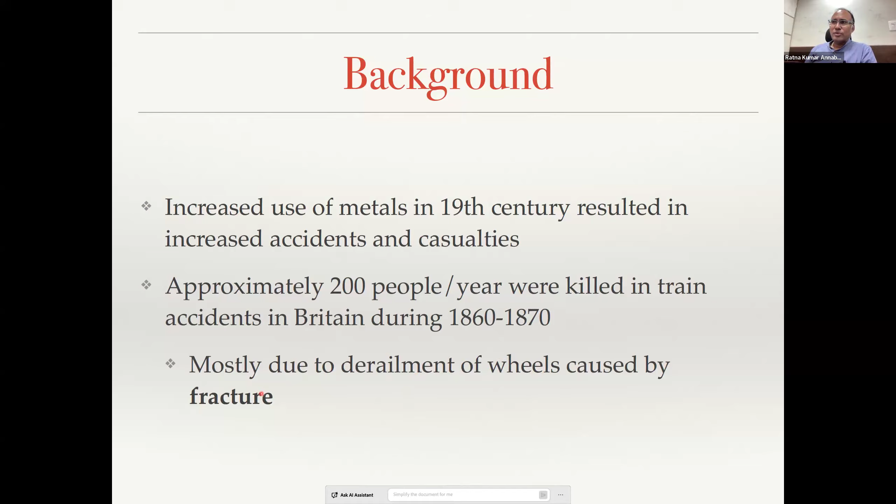Most of these accidents happened due to derailment of wheels, that means railway wheel derailment primarily caused by fracture. That means the wheel would have broken, for example, and that led to the failure, or led to the accident.

So if you look at news items on fracture failures in Britain: on 19th March 1830, at the Montrose Suspension Bridge, which had suspension wires made of steel metal cables, at one point there were 700 people standing on the bridge to watch boat rides, which were quite popular in Britain. The suspension bridge collapsed, meaning one of the wires gave way and then the bridge collapsed.

And in 1887, it seems to have been a very disastrous year for railways in the UK, where within a span of 3-4 months there were several accidents. On 20th April 1887, they saw the most serious train accident, which happened because of the breakage of the drawbar. There are other similar accidents, most of them associated with fracture failure of the components.

Another popular failure was observed in these Liberty ship accidents. During the Second World War, Liberty ships were used in the Atlantic Ocean to fight Nazi forces, but in Britain, they were making these ships and didn't have enough capacity to make so many number of ships.

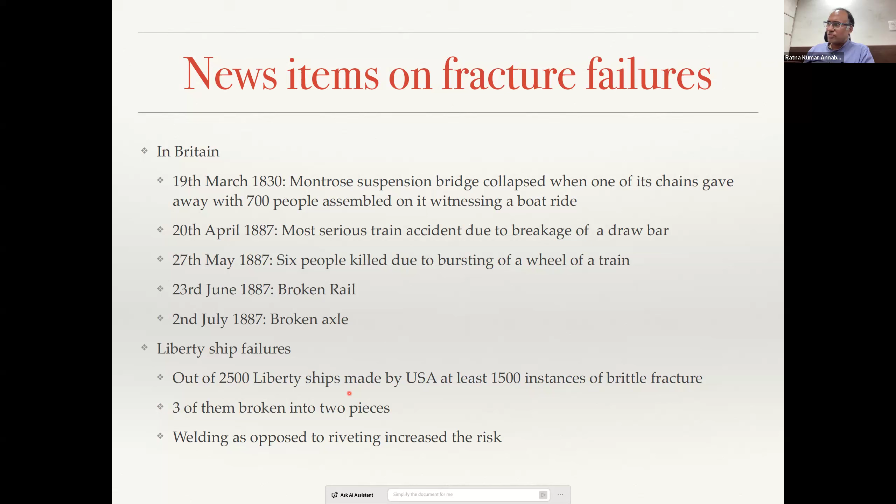So all these failures, whatever happened, are catastrophic failures primarily because of fracture, and all of them involved the presence of cracks.

For example, if you talk about commercial aircrafts, you do a periodic inspection every time the flight is taken, the moment it lands. There will be several inspections done, called visual inspections. But from time to time, every 3 months or so, they will do a detailed non-destructive evaluation of the flights.

Meaning, they will try to understand by sending ultrasonic waves and try to measure the length of a crack. All these structures will have cracks in them.

No matter what you do, you cannot produce a product without cracks. There will be cracks, but are these cracks of such a size that one needs to be worried about? That is what these periodic inspections will tell you. And if they are not critical, then they will let the flight fly. Otherwise, they will have to do some intervention.

Similarly, cracks or crack-like defects in ship structures, bridges, pressure vessels, everywhere you will have cracks. And hence also in nuclear reactors, cracks or crack-like defects are a serious concern. So one needs to keep in mind how to design components when there is a crack present in the material.

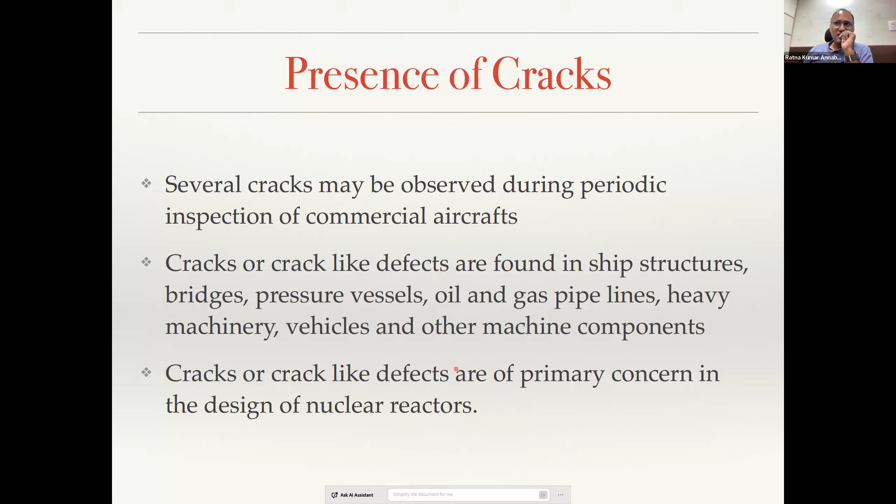So in the previous classes, we talked about the stress concentration factor. When there is a geometric constriction, you have stress concentration, because of which locally there will be very high stress generated, although far away your applied stress is less. That is designated by the theoretical stress concentration factor.

What does it indicate? It indicates the average load required for the onset of plastic deformation. That means if you apply 100 MPa, you may have a region where the stress concentration is 4, and hence locally the material is experiencing 400 MPa, which is much above the yield strength of the material. So one needs to be very careful about it.

This KT, the theoretical stress concentration factor, is limited to structures with known dimensions. As we saw in the last class, to compute KT you have to know the dimensions. Depending on the dimensions, the KT may change.

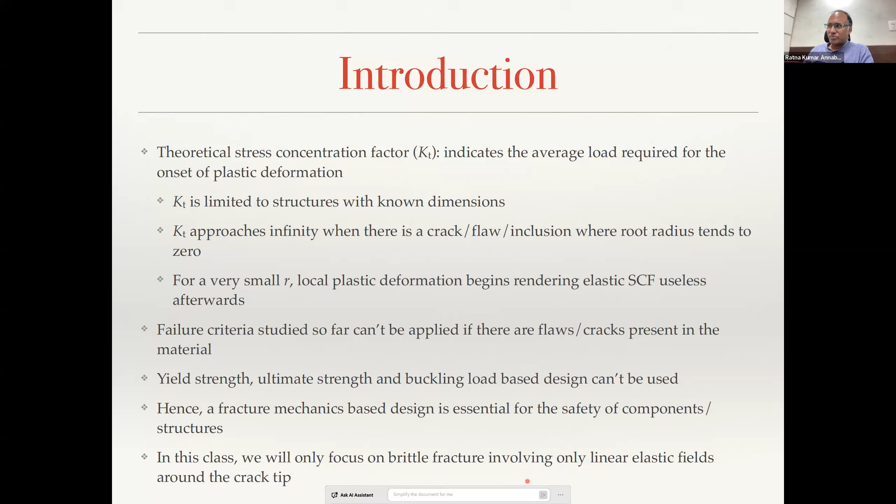As I told you, if you look at an elliptic crack, ellipsoidal crack, and you apply a far field stress, the stress concentration factor, sigma at any position, depends on the far field stress S times 1 plus 2 root C by rho. The sigma we are talking about is at the crack tip, at this position. Now rho is the radius of the crack tip.

What is the radius of the crack tip? If you plot the curvature of the crack tip, and plot the stress concentration factor, that is sigma by S on the y-axis, and x by rho, the position, on the x-axis, at a given position what is the stress? Far away it should be equal to sigma y, but near the crack tip it is going to be 7 times the stress, the stress concentration factor, depending on the value of C by D being 3, 2 times 3 is 6, and then it will be 6 plus 1 is 7.

So the stress concentration factor is 7. That means, although far field you have applied only 100 MPa, here you will see 700 MPa. And that could be much beyond the ultimate strength of the material, and hence you need to be concerned.

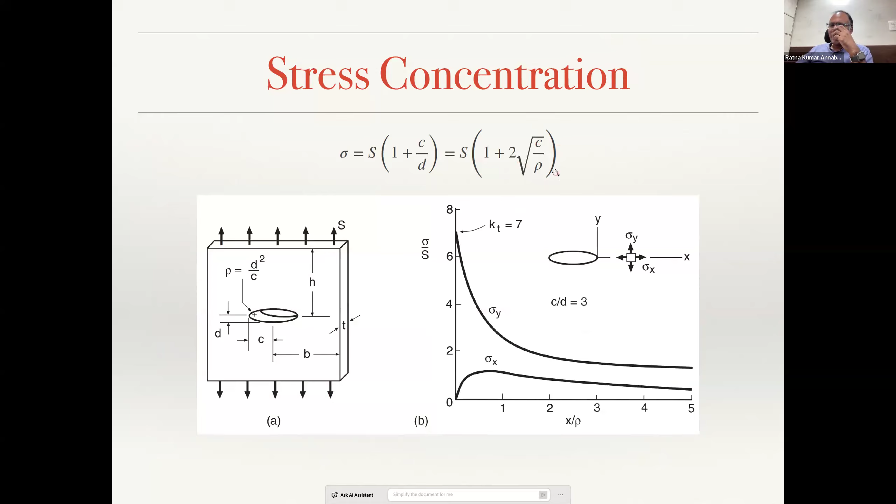Similarly, if you have a purely brittle material, you will have several micro cracks ahead of the crack tip, and those get activated when you apply the load. So there are different ways that the stress concentration can develop, but unlike the theoretical stress concentration factor that we estimated to be infinite, in reality it will never be infinite because of these various constraints we encounter in real materials.

Okay, now let us look at this particular scenario. On the left hand side in this figure, on the y-axis you are plotting crack size, on the x-axis as a function of time. Let us say you have a structure whose crack length is some number initially. As the structure is subjected to loading, as a function of time, the crack length is increasing.

So when the crack length is A0 here, the structure will have some strength. That is what we call the design strength of the material, assuming there is no crack. But as the crack increases its length, the material's ability to resist the load decreases, isn't it? The residual strength decreases, right?

And let us say you have designed a component whose expected highest service load is this, right? And you have designed the component here. From here to here, failure will not occur because the expected highest service load is here. And once the crack length increases beyond that, you will have further reduction in strength, and that is when failure may occur.

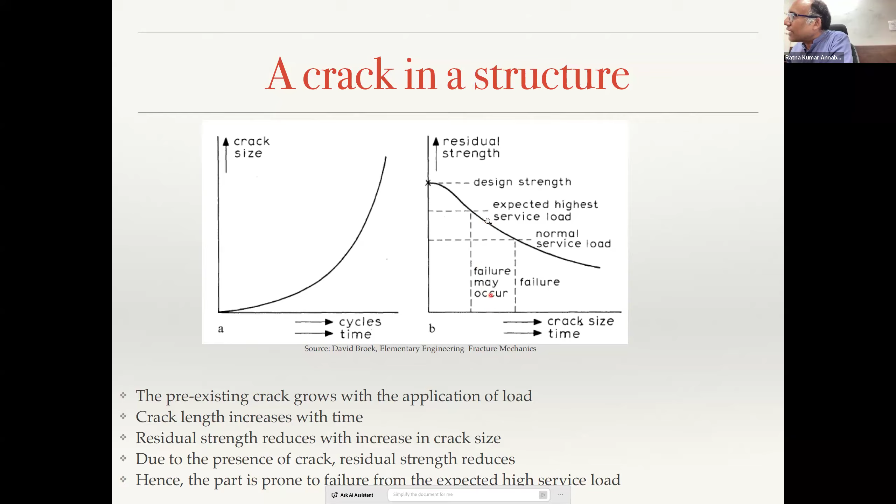Now the second question: let us say this is my service load, meaning this is the load that the component is going to be exposed to. The question I can ask is, what is the maximum size of crack that I can tolerate? I know my service load, so do I know the size of crack up to which I can tolerate? For example, if my crack size is this, then at the service load, the residual strength is this. If I am confident that my component is only going to operate at the service load, and I am not going to increase it, then depending on the factor of safety, I can possibly allow this much crack size. So that is the question: can I know what that crack size is that I can allow?

The third question is, let us say I know what the critical crack size is. I should ensure that I know my service load, and I should ensure that my crack size does not go beyond this value. Now, when I commissioned the component, I did the NDT and found that the maximum crack size is some number, much smaller than the critical crack size. When will the structure fail? When this initial crack size grows to the critical crack size - that is when the structure will give way. Now the question is, how long does it take for this initial small crack to grow to the critical crack size? That's important information for us as engineers to decide whether we can keep the component in service or not.

For example, if I have designed an automobile axle, and the service life of the automobile axle is 20 years - that is the maximum service life I have given, I have not given warranty beyond 20 years - now the question is, what is the maximum size of crack that can be permitted when the structure starts its service life? Meaning, if I have to give a life of 20 years, at the beginning of service what is the maximum size of crack that I can have? If I have a crack larger than that, I cannot give 20 years of service, because within 20 years it might reach critical crack size.

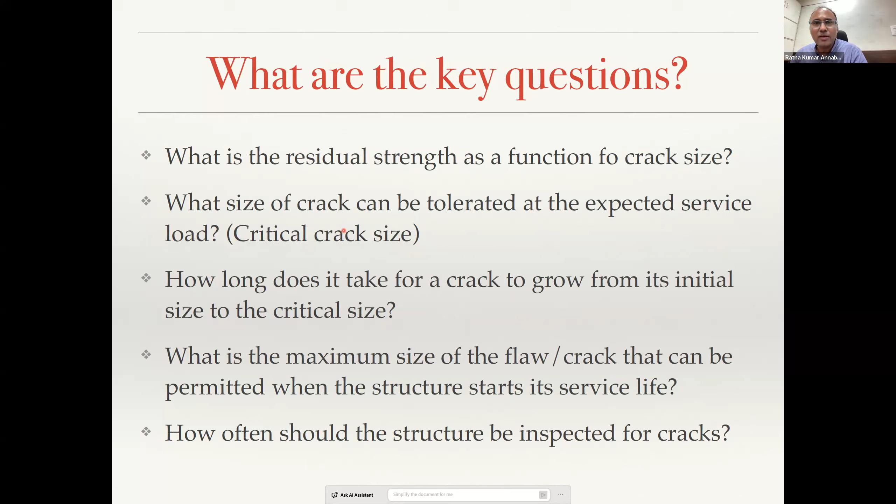These are questions that we have, and the answers to these questions are extremely important in order to ensure safe working of a component that you are deploying. So who will answer these questions? The answers to these questions, or some of them, can be given by fracture mechanics. If you adopt a fracture mechanics approach, you can answer some of these questions. For the other questions which cannot be answered directly by fracture mechanics, fracture mechanics can show a direction in which you can go in order to find the answer. That is the reason why we need to study fracture mechanics.

Okay? Any questions until now?

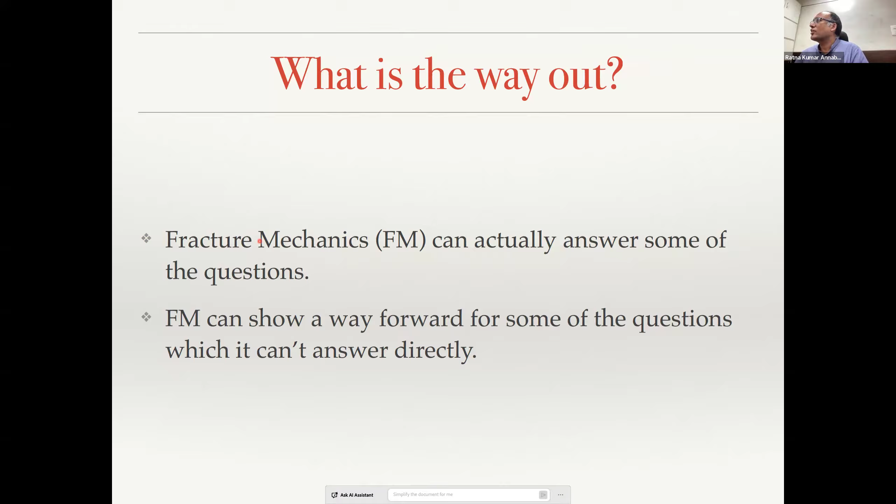Okay, if there are no further questions, now what do we mean by fracture mechanics? At what scale do I need to study fracture? There are various scales at which we can understand it.

One, you can start from the atomic scale, meaning you can actually talk about interatomic bond failure. That is also fracture mechanics, but it's interatomic bond breakage. So when do two atoms get separated? Suppose if you apply only a normal load, how do they get separated? If you apply an oblique load, how do they get separated? Is it the same way?

Then you have an intermediate level where you talk about crystals and dislocations, individual atoms, individual grains. That's a much higher length scale, looking at how a crack propagates through the grains. This happens at a few micrometers to millimeter scale, while plasticity happens at a few millimeter scale, because you homogenize these individual grains and only talk about macroscopic plastic deformation. There you talk about how the crack grows.

And then you talk about laboratory scale testing to measure the fracture toughness of the material. But all these should be used at the application level. If you are designing an aircraft, you need to ensure it will not break after so many flights. So fracture mechanics cuts across all these length scales, and a successful design based on fracture mechanics requires knowledge across these domains.

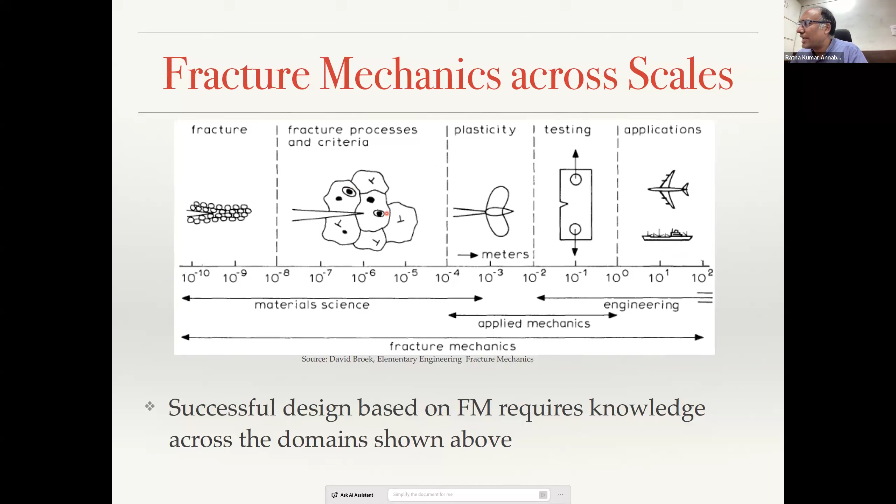That is why we studied crystal structure and deformation mechanisms, and what we mean by plastic deformation, and macroscopically, how the stress strain curve looks like. All these we have had a gentle introduction to. So having this knowledge will enable us to understand fracture mechanics based design a little better.

Okay, so now whenever we talk about fracture, we talk about modes of fracture. There are 3 modes of fracture. This is what we call the opening mode.

So if you have a specimen like this, and this is your crack, and this is your crack face, and if your load is applied normal to the crack face and it opens the crack, this is called mode 1 crack, the opening mode. And if your applied load is parallel to the crack face, in the plane of the crack face, then it is called mode 2.

This is what we call sliding mode. And this is mode 3, which is called tearing mode, wherein the load is not normal to the crack face, but is in the out-of-plane direction to the crack surface. So that is what we call tearing mode. Any failure in a component can happen only in mode 1, mode 2, or mode 3, or a combination of these modes, depending upon the type of loading.

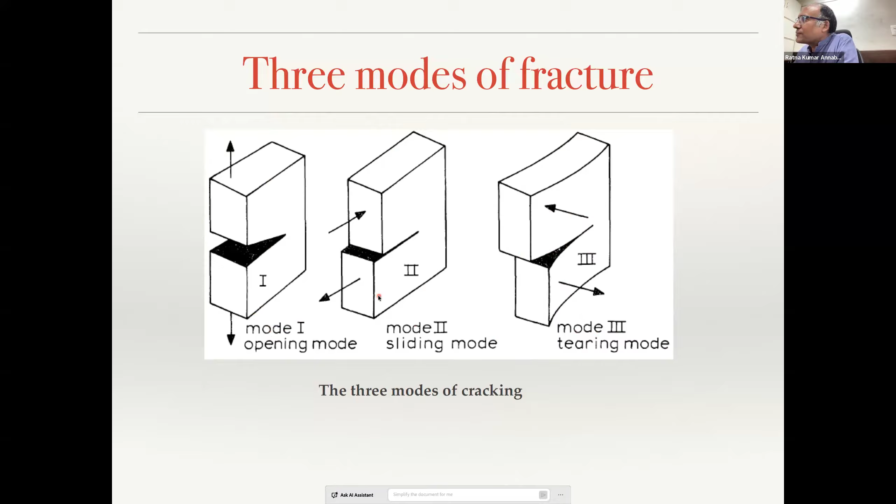So now let us do a very interesting experiment in order to understand fracture mechanics. This is what we call a Griffith's experiment. Griffith is called the father of fracture mechanics. He did an experiment on a brittle material, or more precisely, on a glass plate.

He has a brittle material which is unstretched in this configuration, and then he took that and stretched the material. That means he deformed the material and then fixed it. So you take a material, deform it, and then fix the ends. After deforming, you are not letting it move anymore. The ends cannot move now.

And then what he did was, he took a knife and created a crack at the center. What happens then? When you create a crack at the center, what happens? It will start to grow actually. Not necessarily all the time. We will do this experiment in class now, and then you will realize what would happen. There will be some stress concentration. You have created the crack. Now let us try to understand what happens when you load the system. There is some strain energy that is stored in the material. Do you agree?

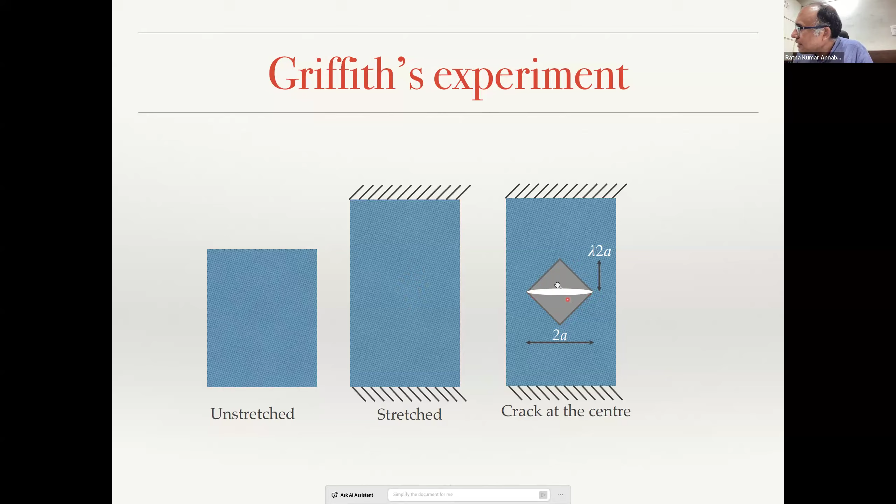Isn't it the energy should be consumed to create a new surface? That consumption is coming from the stored energy. The moment you create a crack, you have created a slit. That slit is formed by consuming the strain energy. The strain energy gets released. The stored energy gets released, and that is forming these 2 new surfaces.

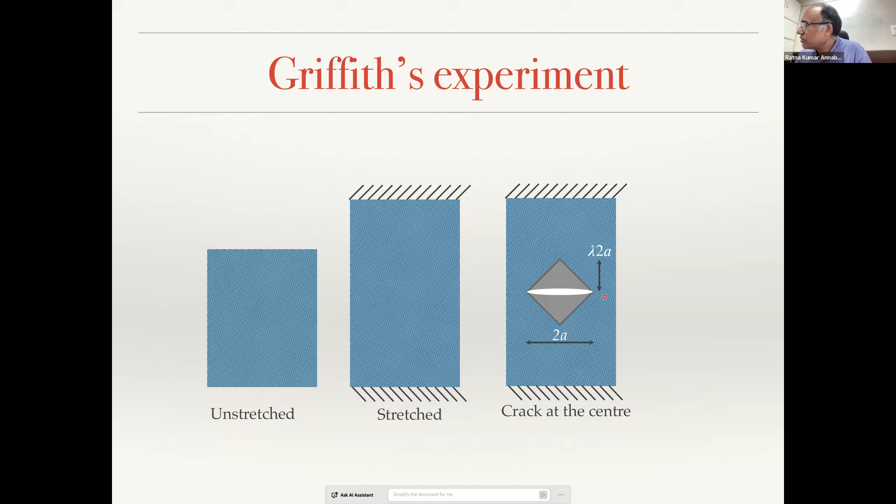Is that clear? So this is Alan Arnold Griffith. Now, where will the energy come from? The energy that is getting released to create these 2 new surfaces will come from the entire plate. But for simplicity, for the sake of argument, we assume the energy is coming from these 2 triangles, whose base is 2a and height is lambda times 2a.

So this is the experiment. Take a sheet, a paper, apply a force, stretch it and then hold the grips. What is the meaning of that? If I am taking this fellow, this is the paper, I am applying some load. I have applied certain load, but it is not flat enough, so I ensure that it is flat enough. After applying the load, hold it.

What do you mean by holding it? You should not be moving the grips. That means these ends cannot move anymore. It should be at that scenario. Now use a knife to cut a slit. So while holding, you ask your friend or someone close by to cut a slit in the center.

And the length of the crack is to be ensured to be small. If you cut a small crack, nothing will happen. Can some of you in the classroom, maybe 2 people, try to do this experiment? You take a paper, stretch it a little bit, hold it, and ask someone else to make a slit in the center. Nothing will happen if the slit length is smaller.

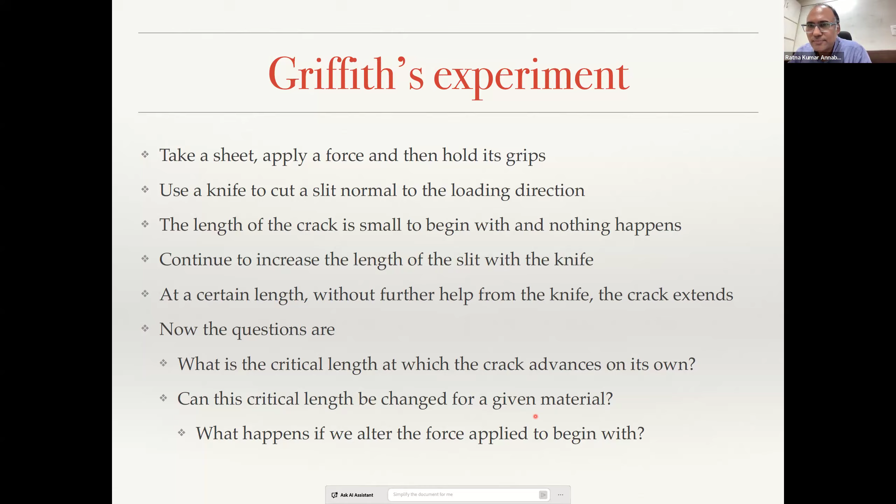Now the questions are the following. What is the critical crack length at which the crack advances on its own without any further help? And can I change this critical crack length for a given material? Also, if you have initially stretched it to x displacement and held it, or instead stretched it to 2x displacement and held it, is it going to influence the critical crack length? So these are the questions that we asked.

So now we need to understand surface energy. Like surface tension in liquids, solids possess something called surface energy. In a solid, all the atoms in the bulk are surrounded by a similar environment, whereas on the surface, only the atoms below the top layer offer bond strength to the top layer, but there is nothing above it. So the atoms at the free surface and few layers below have bonding force only from beneath and very little from above. As a result, the surface layers experience strain and deform. The deformation of the surface atoms is what we call surface energy.

And what Griffith said was, the crack in a material advances when the released energy exceeds the energy required to create 2 new surfaces. So when you are creating a slit, some amount of energy is released. And when that released energy exceeds the energy required to create 2 new surfaces, that is when the crack propagates. Otherwise, the crack will not advance. Is that clear?

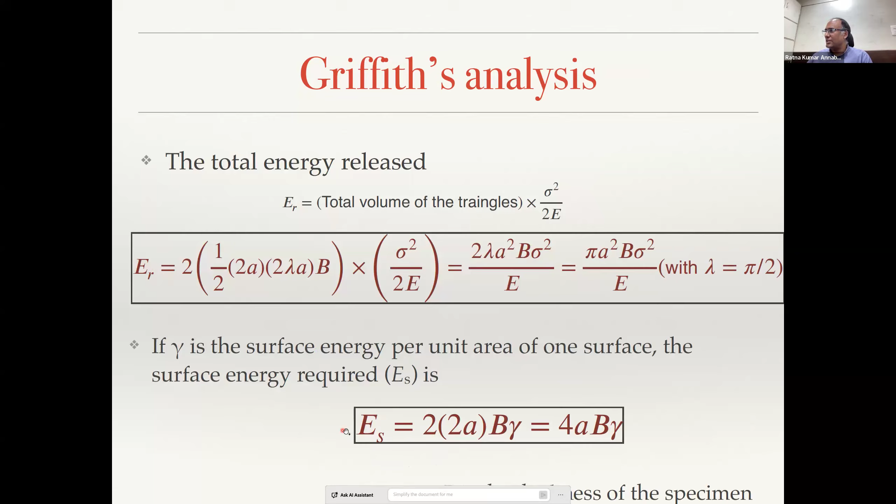Now if you plot this total energy released and surface energy, you will see that the surface energy increases linearly with A, the crack length - a linear relation. Whereas the energy released is a parabolic relation. So this one is surface energy and this one is your energy released.

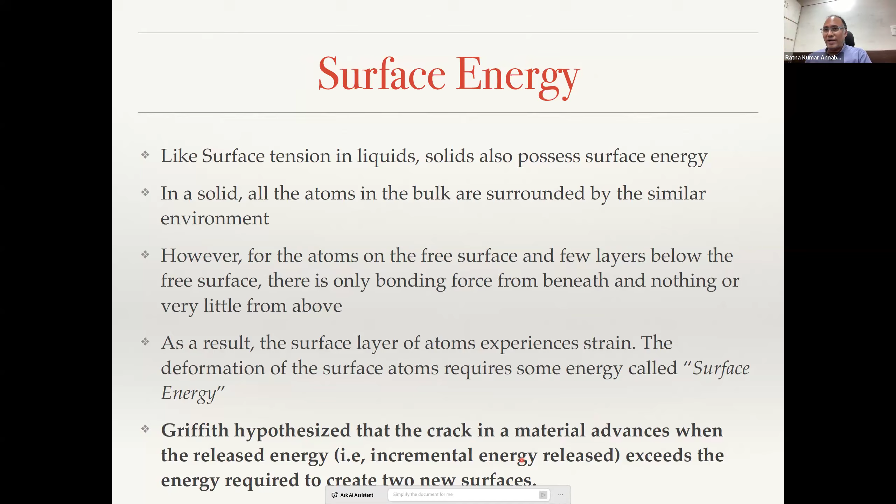And you will see, what did Griffith say? Suppose if you have a crack of certain length, and now if you increase the length by some amount, there is an incremental surface energy release for that small increase in crack length. If that incremental energy release is greater than the surface energy required at that instance, that is when failure happens. So what do you mean by incremental surface energy? The derivative, dER by dA, that is this.

From here to here, the slope is less than ES, because this line is parallel to ES - until here, the incremental energy released is less than the surface energy created. Beyond that, dER by dA, this slope, is larger than the ES value - that is when crack propagates. So that is why this is what we call critical crack length. If you have an initial crack of A0, the crack will not propagate until A0 becomes AC. After that, the crack propagates.

So if your dER by dA is greater than dES by dA, the slope of this line, then plugging in those equations, your critical crack length should be less than or equal to 2E gamma by pi sigma square. E is the elastic modulus, gamma is surface energy, sigma is the applied stress - the applied uniaxial stress. So your critical crack length depends on surface energy and elastic modulus, which are material properties, but sigma is the applied load. So if you apply a larger load, the critical crack length will be smaller - at a small crack length it will catastrophically propagate.

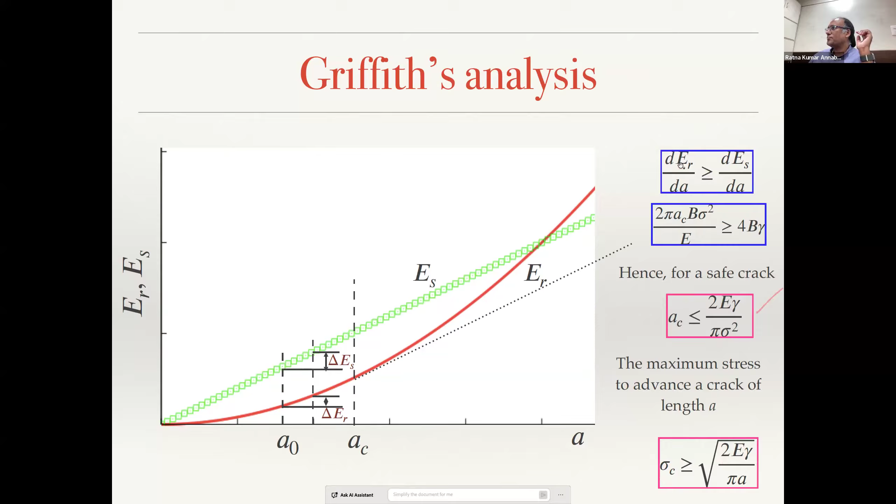So now with an advancing crack, the strain - we know that the strain energy in the component can either decrease or increase. We will see how it can increase. However, the stiffness of the component decreases.

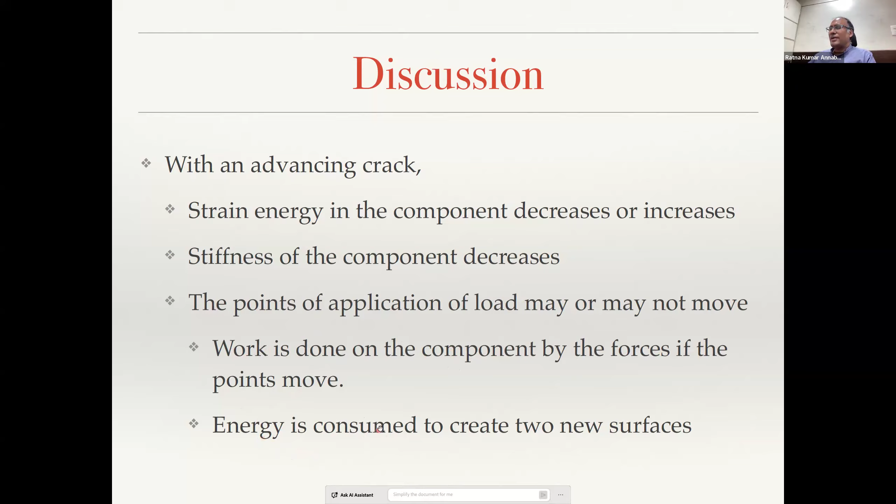Depending upon the boundary condition, the point of application of load may move or may not move. If you have a fixed boundary, the boundaries will not move. Work is done on the component by the forces if the points move. Otherwise, energy is consumed to create two new surfaces. This is something we already know.

Now we will calculate something called the energy release rate, that is, what is the energy released per unit crack length. That is dER by dA, which we have calculated. This is called the energy release rate, given the symbol G, in honor of Griffith. It tells you how much energy is released when a crack advances, per unit increase in crack area.

Let us consider an incremental increase in the crack area to be delta A. Initially you have some crack, and then you extend it, so the crack area increases by delta A. There is an incremental external work done to create this crack extension. You need to apply a load or do some work, so that incremental work is delta W external. As a result, the change in strain energy of the body is delta U. If it is positive, it is increasing; if negative, it is decreasing.

So the available energy, energy release rate times delta A, provides the energy balance. G times delta A equals external work, this is the energy per unit area times area, so energy equals external work minus change in internal energy. If you divide everything by delta A, and in the limit delta A tends to 0, you get the energy release rate G is equal to minus d by dA of U minus W external, where U is the potential energy or strain energy, and W is the external work.

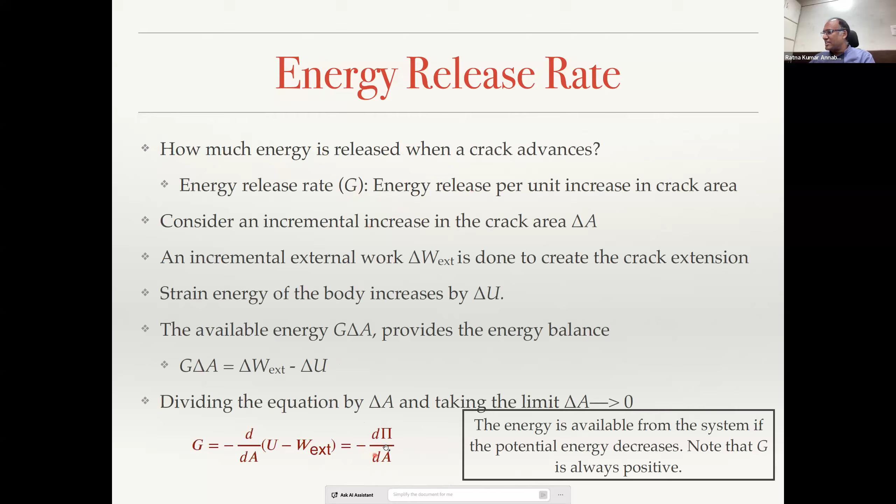Now let us assume a plate of uniform thickness B. Then G can be written as minus 1 by B, d pi by da. Otherwise, that dA is written as B times da, where da is the small crack length.

Now let us take the example of a DCB specimen. DCB specimen is a double cantilever beam specimen. Do you know how it looks like?

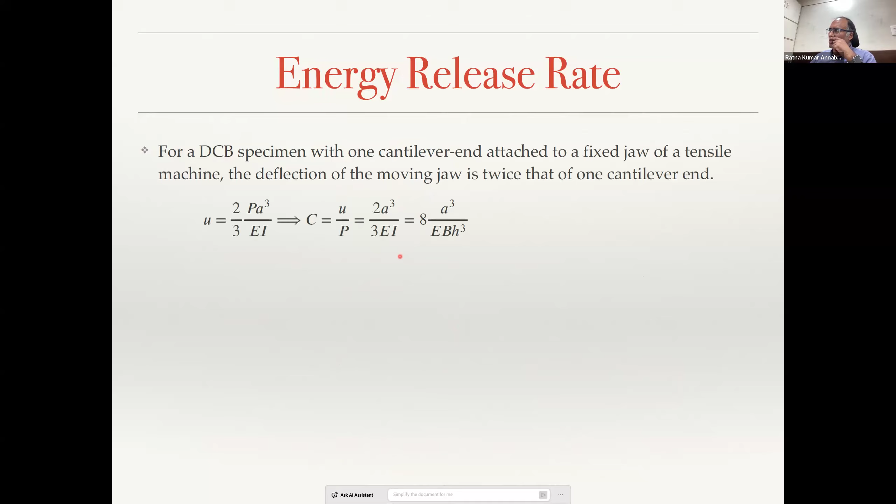It's not drawn yet, I just wanted to know how many of you know how the double cantilever beam specimen looks like. Or you don't know? You have to say yes or no. No sir, no sir, no sir. Why is it taking so long to answer? Okay, let me move to my slides.

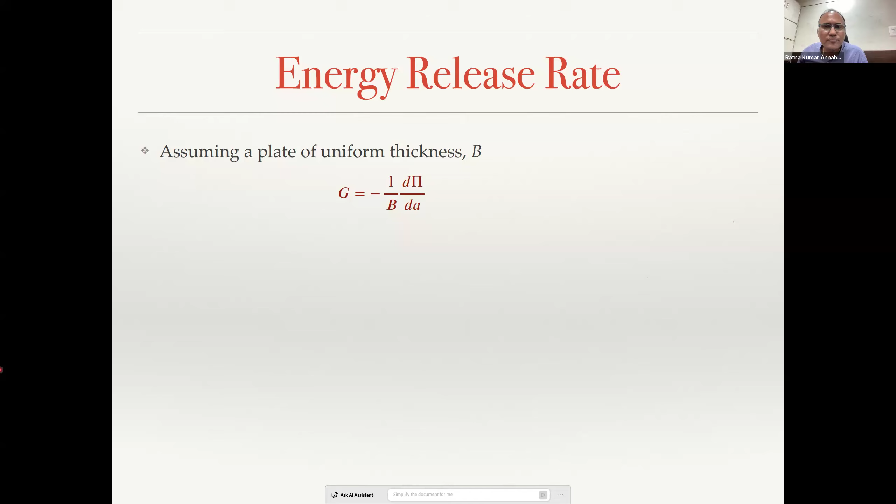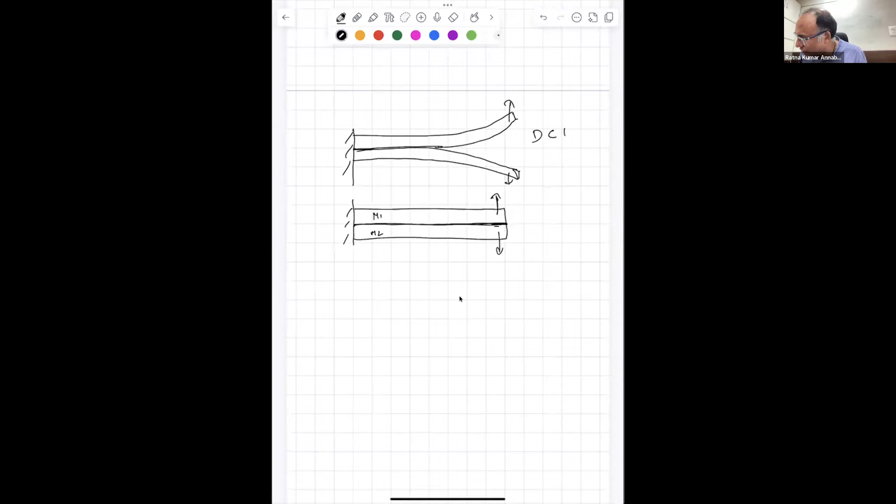A double cantilever beam specimen looks something like this. So initially you have this is material 1 and material 2, or it's the same material but with an interface. This is the interface. Now if you apply a load, let's say there is a crack here, then as you apply the load, the crack gets opened, and that is how this deforms. This is what we call a double cantilever beam, because this is one cantilever, and this is another cantilever.

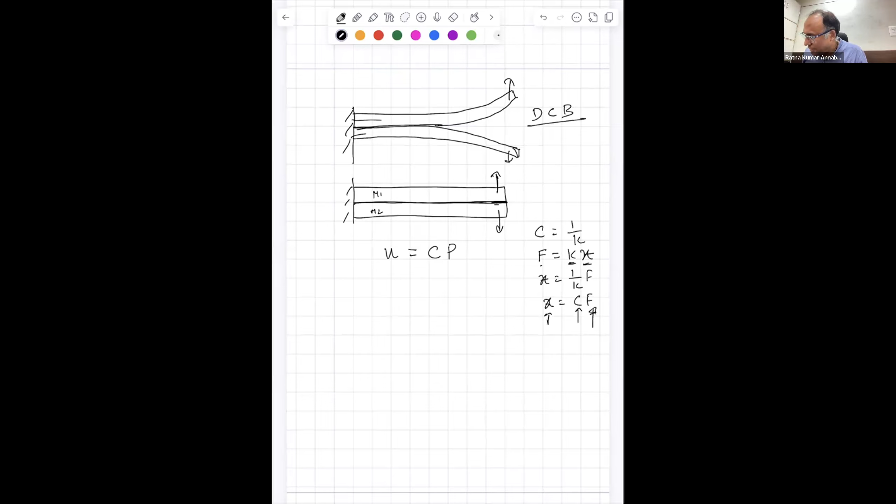Now let us say in this double cantilever beam specimen, the displacement U is written as compliance times load. What is compliance? Opposite of stiffness, right? Compliance is 1 by stiffness K. Normally F is equal to Kx, force equals stiffness times displacement. So x is equal to 1 by K times F, that is C times F. So displacement is equal to compliance times force applied. Here this is displacement, this is compliance, and this is force.

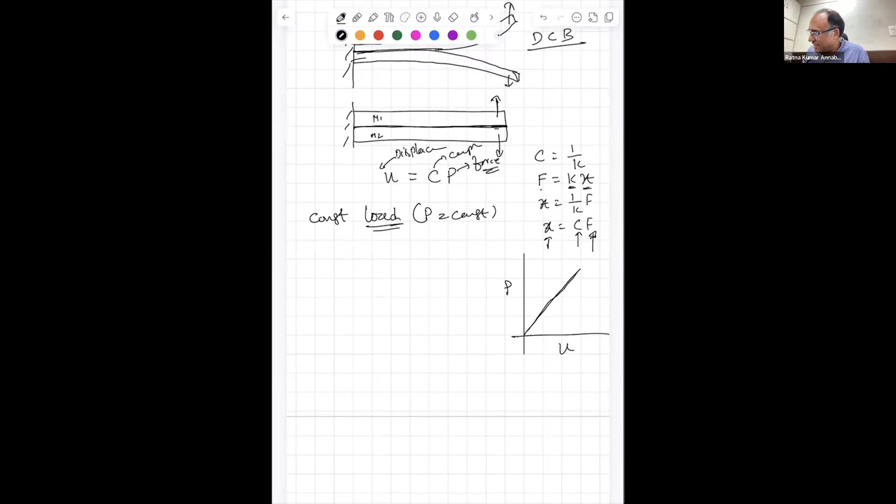Now let us take a scenario where we have a constant load applied, that means P is equal to constant. Then the strain energy, this is a linear elastic material, so P versus displacement will give you a straight line if it is linear elastic. So the strain energy can be written as half P times U, since strain energy is the area under this curve. Now W external work: if I am applying a load P, because of that there is a displacement U. Force times displacement is your work done.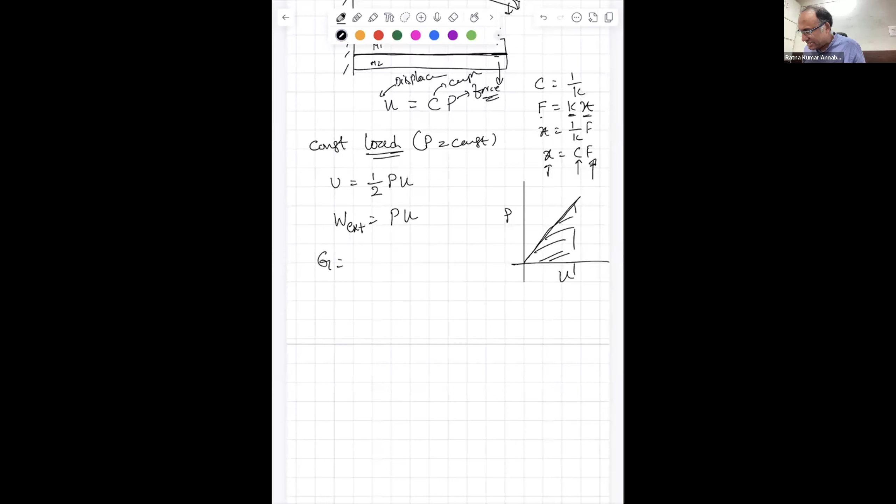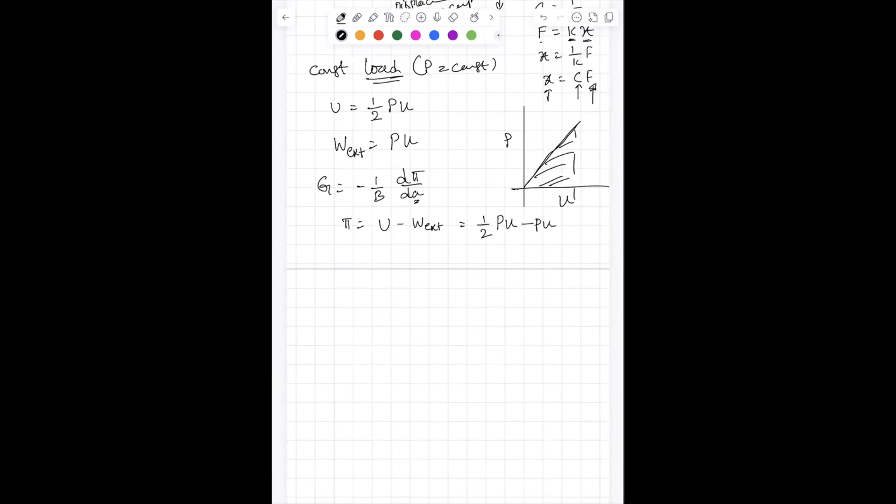Now the strain energy release rate is given as minus 1 by B, d pi by dA, where A is the crack length. What is potential energy? U minus W external. So that is equal to half Pu minus Pu, which means your potential energy is minus half Pu. So now G is equal to minus 1 by B, d pi by dA, that is equal to 1 by B, d by dA of half Pu.

We are applying a constant load, right? So P is constant means P can be taken out. Then that means P by 2B, du by dA. But we have written that U is equal to Cp. That implies U is equal to Cp, so that is equal to P by 2B, d by dA of Cp. Again, P is constant so I can take it out. So this becomes P square by 2B, dC by dA. That is your energy release rate, where C is the compliance of the material.

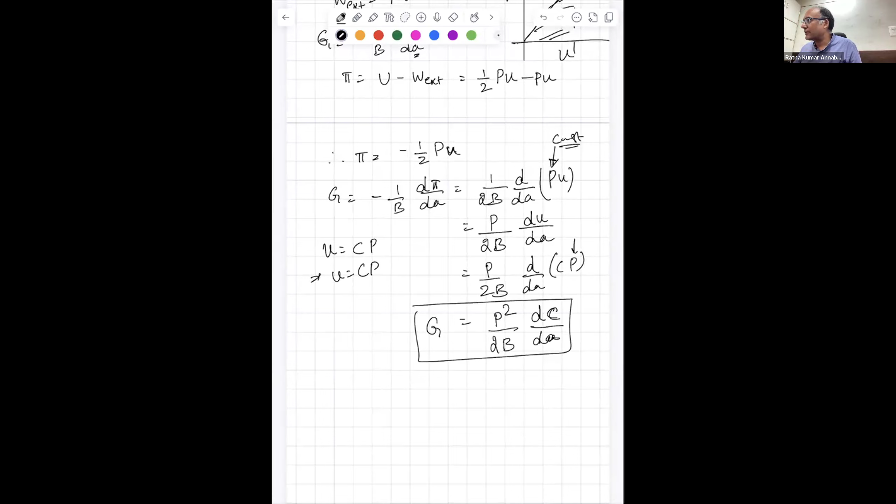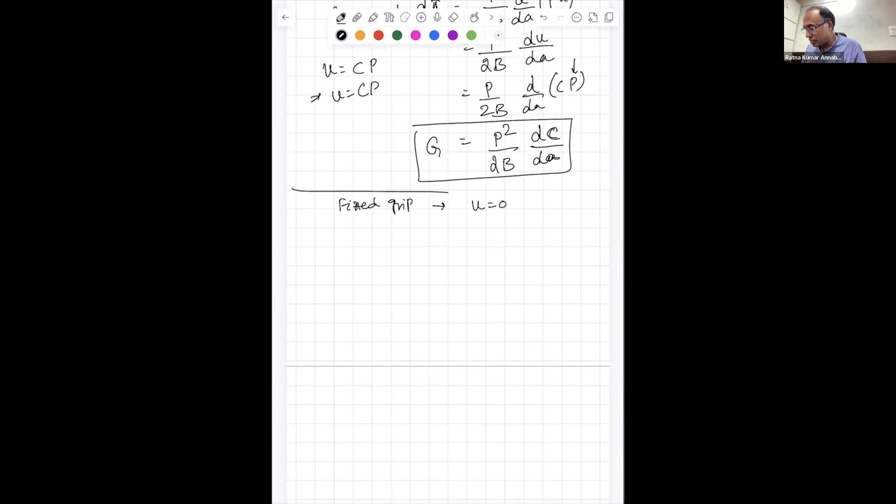Now this is when you have a fixed load, where the load is fixed and the displacement is changing. As opposed to that, if you have a fixed grip, that means U is equal to 0, but P is changing, or U is constant, not 0, and P is changing. Then the potential energy is what? U is not changing, it is constant, displacement is 0 or constant.

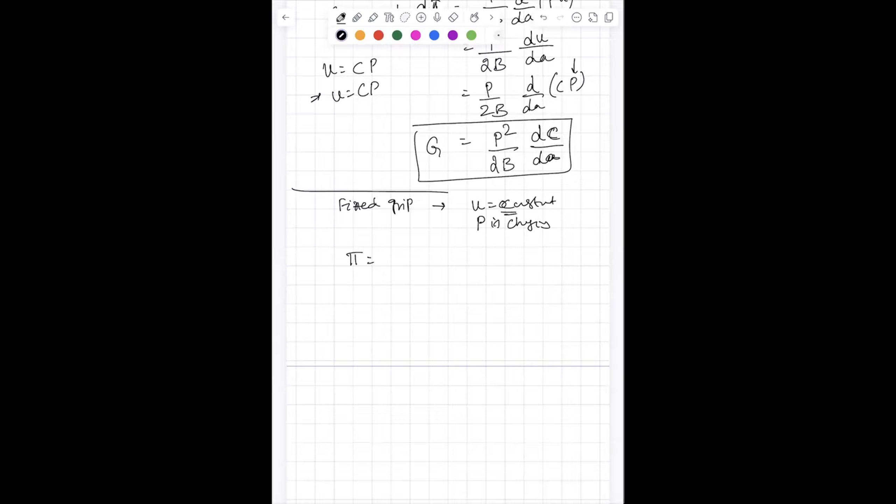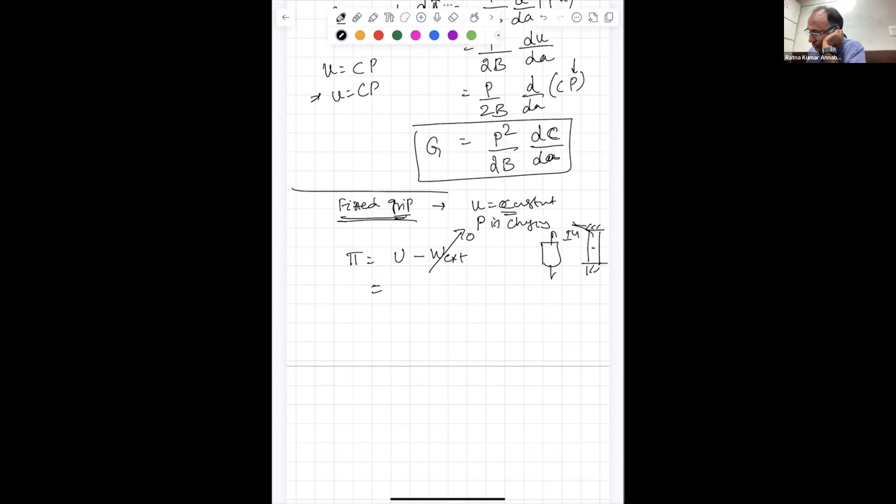So, potential energy is U minus W external. If the grip is not moving, what will be the work done? Zero. If the grip is fixed, the body is deformed and has made a displacement of U, and at that instance it is fixed, meaning it is not moving, so there is no work done. Even if you create a slit, the work done will be 0, and it will be half Pu. That is your potential energy.

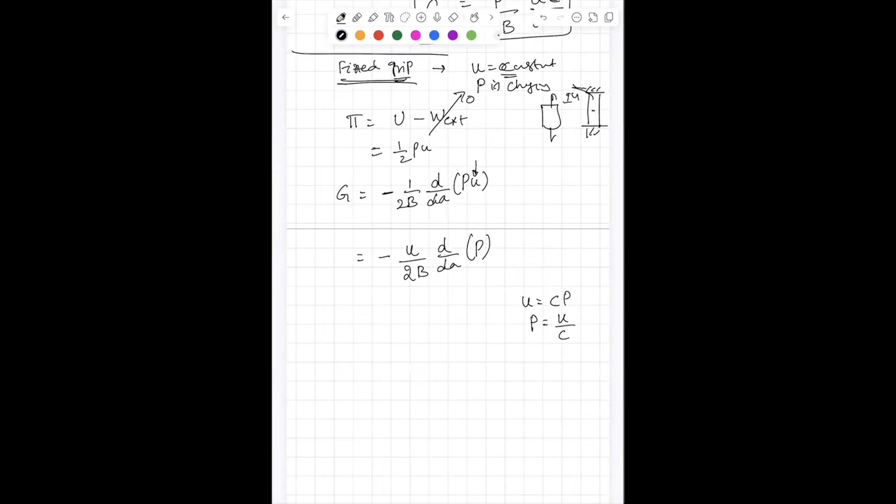So G is equal to minus 1 by B, times 1 by 2B, d by dA of Pu. And we know U is constant, so minus U can be taken out, giving 2B d by dA of P. But we know U is equal to Cp, so P can be written as U by C. So that is equal to minus U by 2B, d by dA of U by C.

And U is constant. But the compliance or stiffness of the material changes as a function of crack length. So I can take U outside: minus U square by 2B, d by dA of 1 by C, or dC by dA. That is nothing but minus U square by 2B, minus 1 by C square, into dC by dA, by the chain rule of differentiation. Do all of you agree with that or not?

And now, I know U is equal to Cp. So in this U, I can plug that in; minus into minus becomes plus. U is Cp, so that is C square P square by 2B times 1 by C square, dC by dA. C square gets cancelled, giving P square by 2B.

Whether you are applying grip, fixed grip or fixed load, your G is P square by 2b into dC by dA, right?

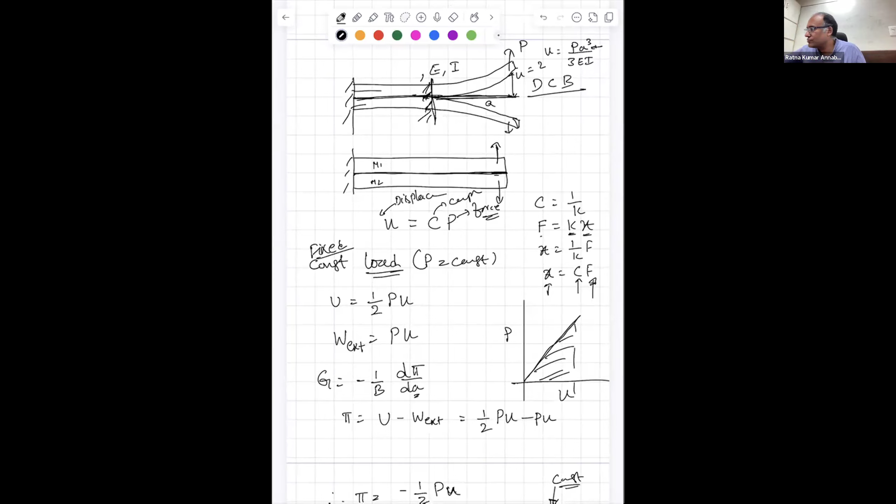It is like this. You carefully look at the experiment that I am showing you here. I have created a crack of certain length. Can you see my screen? Yes, sir. So now if I am applying a load like that, right?

Now everywhere here, in this part, the material is intact. So there is no deformation, there is no displacement that is happening. Now if I am pulling, it is behaving as if this end is the fixed end, isn't it? This is my fixed end, and then the cantilever load I can apply, and the length of the beam is like my crack length. This is my crack length. That is my crack length. You can see that?

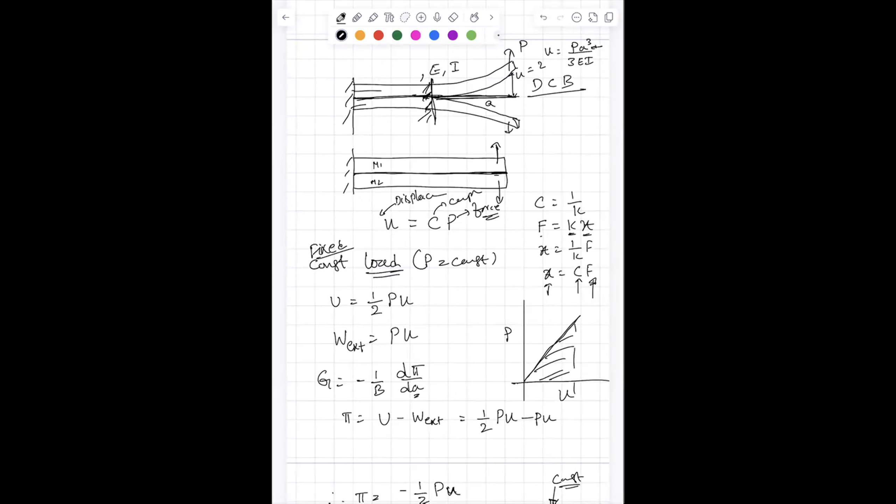Yes, sir. So I can write my U is equal to, for a double cantilever beam, on the top PA cube by 3EI, but at the bottom also it is the same, right? So the total displacement will be 2PA cube by 3EI. And what is compliance? Compliance is equal to U by P, that is equal to 2PA cube by 3EI times 1 by P. P gets cancelled, right? So what do you have?

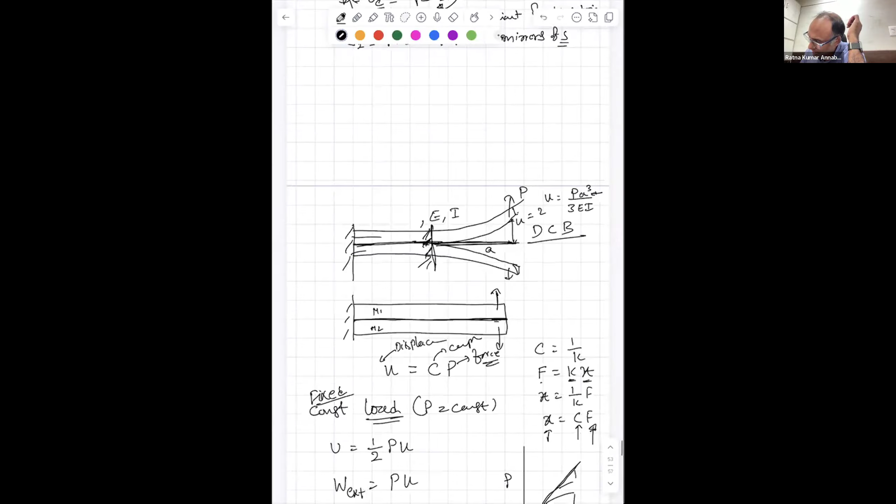2A cube by 3EI. Now you have a specimen with out of plane thickness B, and let us say the cantilever has this to be H, right? Then if that is H, the moment of inertia will be BH cube by 12. Do you agree?

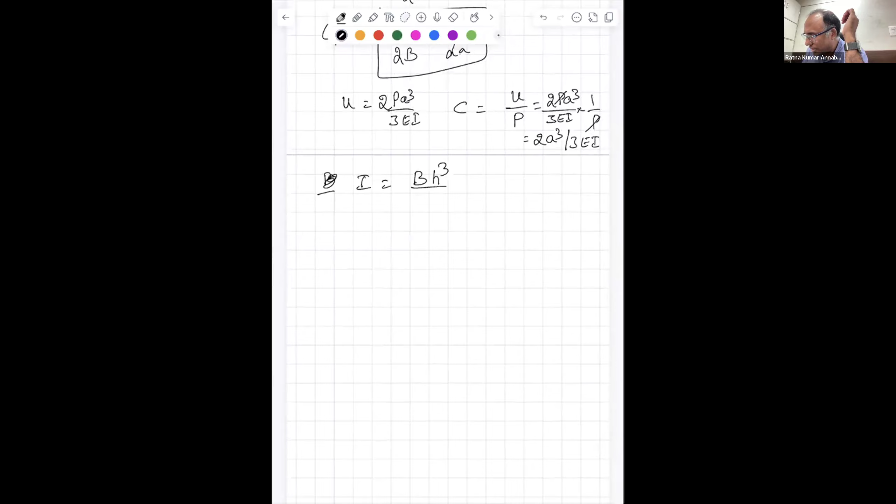So your compliance will be 2A cube by 3E. I is B times H cube by 12. So it will go there, and this is 4, that is 8A cube by EBH cube. That is your compliance.

So what is your dC by dA then? dC by dA is equal to 8 into 3A square by EBH cube. That is 24A square by EBH cube.

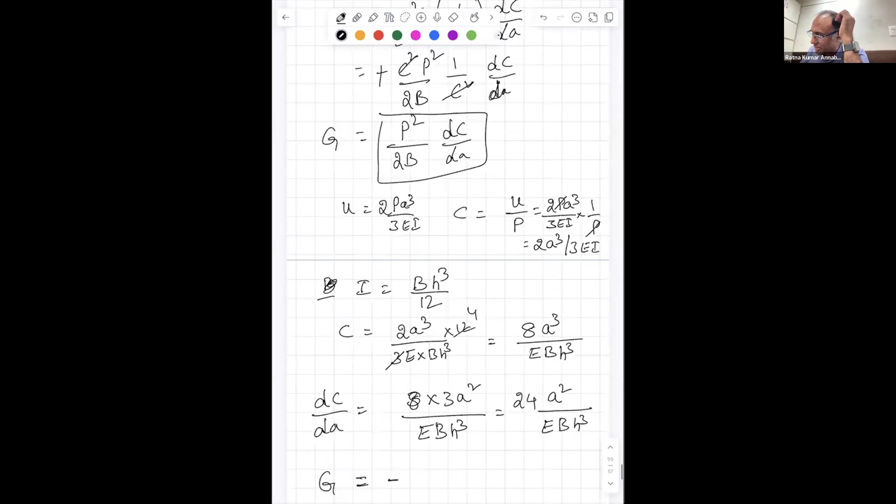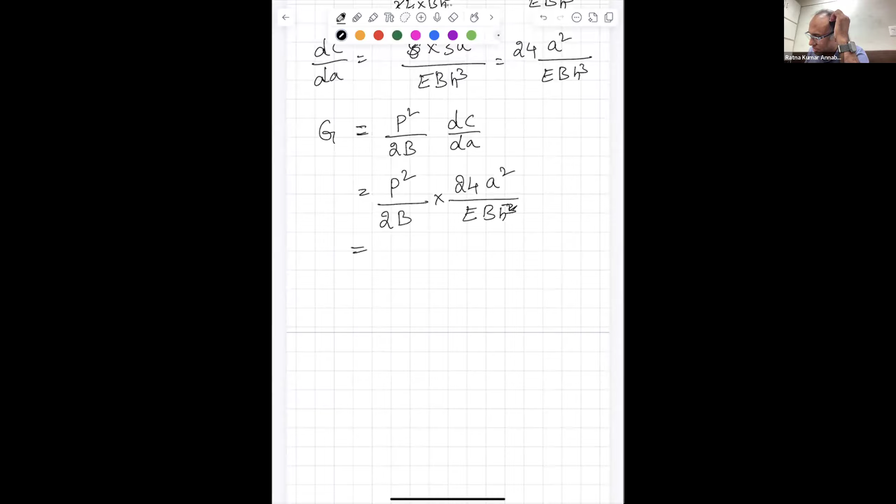So the energy release rate for the cantilever, what is that we have computed? Energy release rate P square by 2b into dC by dA, that is P square by 2b into 24A square by EBH cube, that is nothing but 12 P square A square by EB square H cube. That is your energy release rate.

And this is also called mode 1 energy release rate because the load is applied normal to the crack surface. Okay.

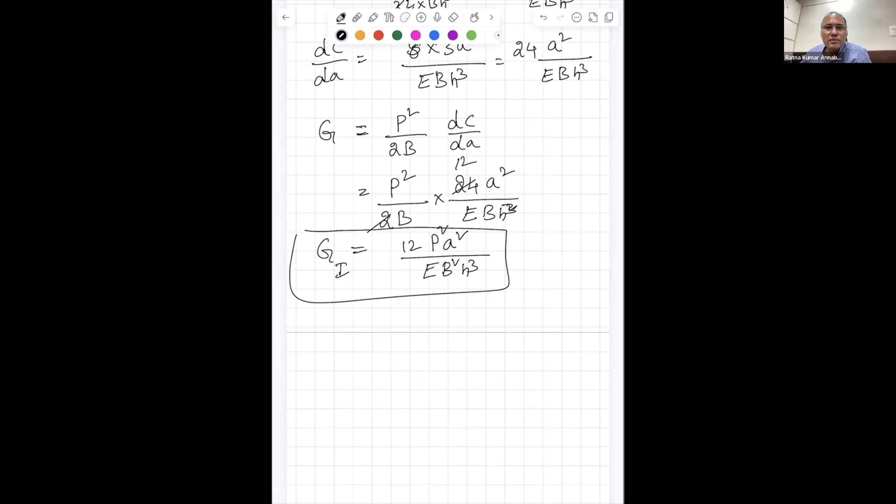Now, let me give you a problem and then let us see if you are able to compute this.

And crack is about to propagate at 15,405 Newton pulling load. That means the crack will propagate when this GI, the energy release rate, becomes equal to critical energy release rate. What he is saying is when I apply the load to be this much, that is when the crack propagates. That means whatever G that you are calculating, that is what is called critical energy release rate. Okay, can you please do the calculation?

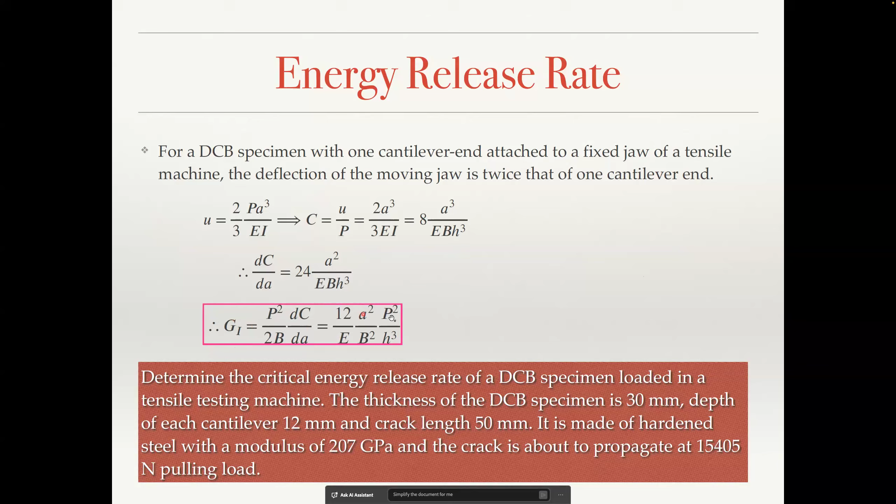And now, your resistance to the material, if it is a ductile material, the resistance to crack propagation also increases as a function of crack length. Let us say you have an initial crack length of A naught, and at that time you have some crack resistance, right?